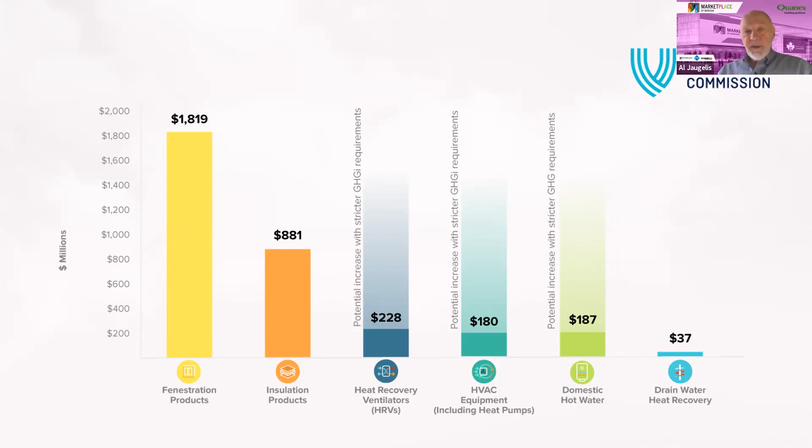So this is an increase in economic value that's projected as the step code moves forward. Absolutely. The idea here was to help the various sectors appreciate that the step code was going to lead to increased economic activity in these various sectors of the construction industry, with the largest amount of business growth coming in the windows area. Absolutely, 100%. I think what the case studies you're going to look at will highlight is that windows are the main drivers and enablers of these changes.

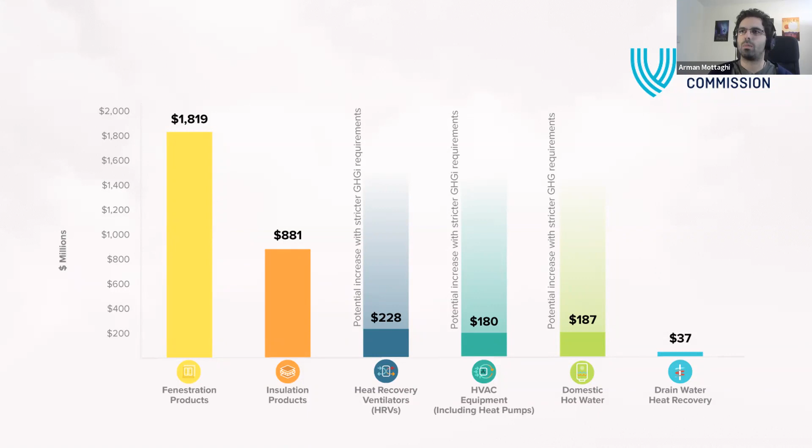So when we look at the total area of buildings built all across Canada, we see that single family homes and row homes, these smaller buildings, have the largest total built area across different sectors. But the cost of building one instance of that building, one archetype, is the lowest among all the archetypes. Then we get to the high-rise apartments, which have the least total area built, but a lot of construction cost to build one.

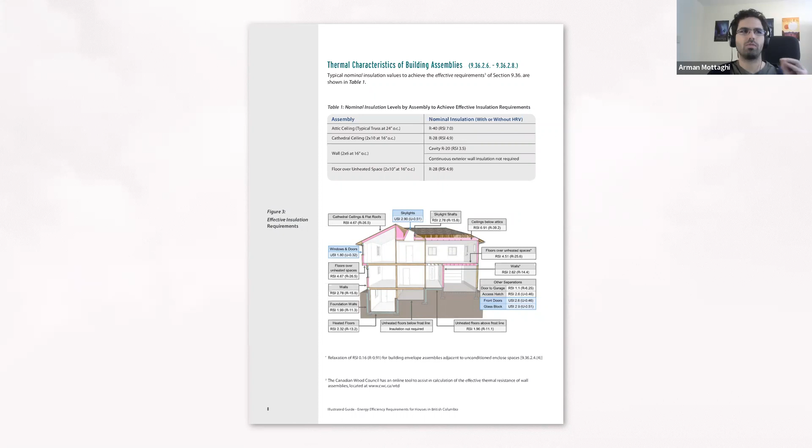So for example, when we look at the windows, we have a U value of 1.8. For the walls, we have an R value of 15.8. And as long as you were meeting these thresholds, these minimums, you would have been fine with complying with the code.

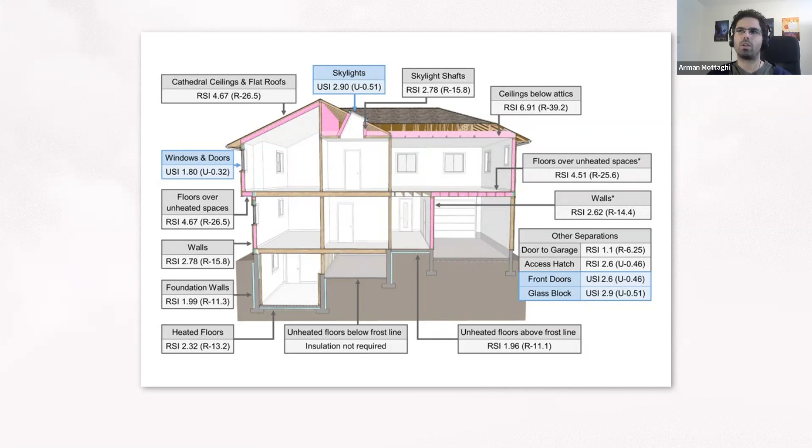Now this wouldn't really work out when we look at the building science principles, because heat transfer in buildings is rather complex. So when we look at the math of it, it seemed like at the time, and it was true, that we need to move on to a more comprehensive system. To give an example, I want to show this photo of a small window in a wall that basically tells us how much heat loss can be caused by a weak element inside the envelope.

Looking at this white area, which is supposed to be the wall, we have 0.25 watts per square meter of heat loss, and for the window piece, we have 8 watts per square meter. But when we put these two together and calculate the heat loss for the unified system, we see that the contribution of that small window is actually about 4 times the whole wall system.

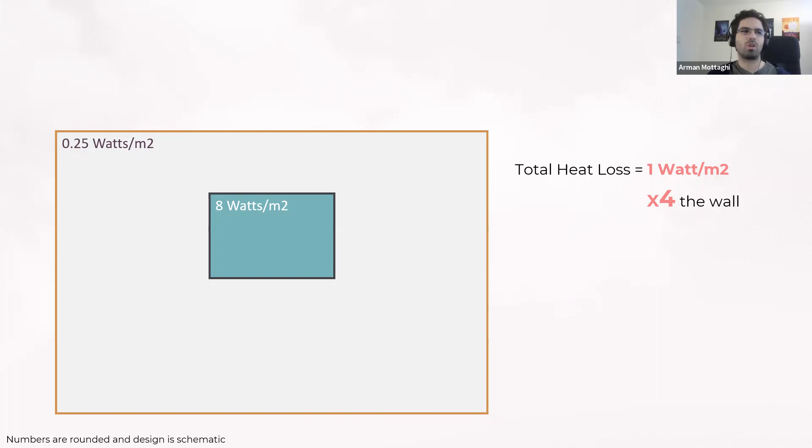So the overall wall system has a heat loss of 1 watt per square meter. And if the size of that window changes, we could be looking at heat losses maybe 10 times the wall area. That is the problem with prescriptive codes being set in stone in terms of minimum code requirements. We definitely want a flexible system that looks at the actual building performance, not just the minimums that have been set, which may differ from one building to another.

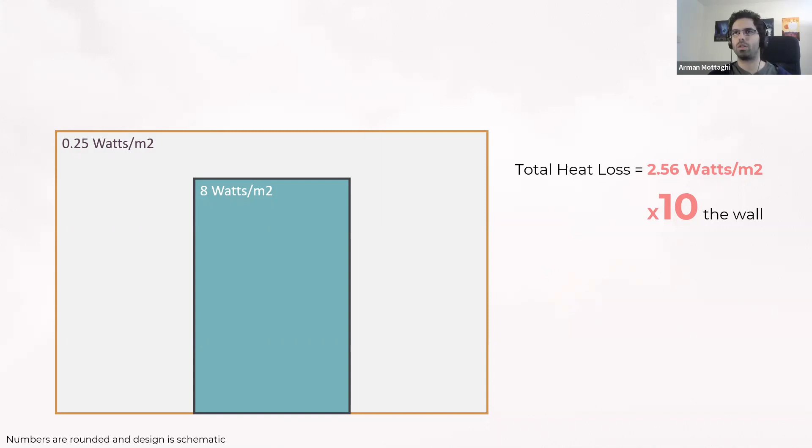I think this has shown itself in the results, or average house consumption, in Canada. Single family homes are using over 120 gigajoules of energy per year.

Now, if I want to put that into context, I'd like to think about making pasta. I'm always amazed that you put a small pot of water on the stove and it takes a very long time for it to start boiling. 120 gigajoules of energy is enough to boil a swimming pool.

One thing I was thinking about, Al, looking at this—I've gone through this a few times, but for this presentation, it came to my mind that actually the older window technologies might exacerbate this issue. I'm thinking the sealants might fail, or some of the properties of the windows might deteriorate over time, and might actually contribute to this average consumption of buildings in Canada. Do you think that would be a true notion?

Well, I think if you went back to the time of aluminum windows here in British Columbia especially, up until the 80s you still had single pane windows being installed, and in the 90s they upgraded to double glazing, but still in aluminum frames. Many of those products have been replaced because the glass failed in the units, as they didn't manage water very well. But the single pane products, the weather strips wore out, the hardware broke down, and made them hard to operate. Of course, they weren't very airtight to begin with, and once their weather strips wore out, they're even less weather tight. So yes, potentially that generation of windows was a huge energy loser.

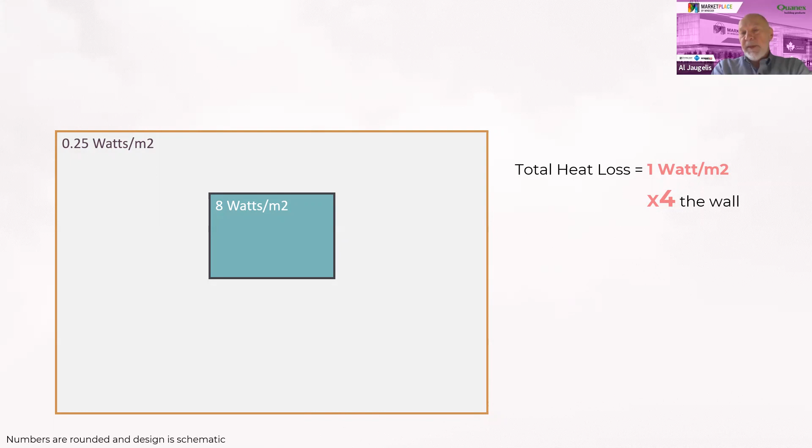And the bigger you make that window, as in the next example, that could be a glass patio door or a large window. Now you're losing so much heat through that window that you could double, triple, or quadruple the insulation in the wall.

It's not going to make up for the heat you're losing through that window or glass door. That's the problem with the prescriptive building code - it makes everything a little bit better: the wall a little better, the window a little better, the roof a little better. But because the window is the biggest energy hole, making it a little bit better wipes out most of the improvements you've made elsewhere, since most of that heat is still escaping most quickly through the window.

So this is the thing I think sometimes people have a hard time wrapping their heads around - not realizing that the energy loss through windows is hugely greater than any other part of that enclosure. Once you make a significant adjustment to the window, it gives you more value than adding insulation anywhere else. I think this kind of slide, if people stop and think about it, focuses on why windows are so important to anything you're going to do to improve the energy performance of the home.

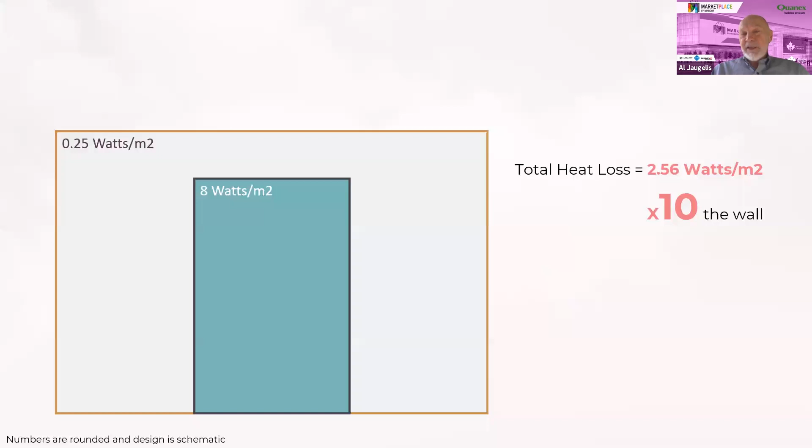As you mentioned, if a typical home heats enough water to boil a swimming pool over its lifetime - if you could deliver it in one hour to the swimming pool, you could boil it. That's a lot of energy, and this is where the codes are trying to solve this problem. And this is just for one year for an average home. Thinking about it is mind-boggling - it's not even a poorly built home, just an average home for one year.

And there are so many low-hanging fruits and opportunities to improve on that. We are also doing some work in retrofits that I will briefly mention at the end, but it really shows us the market potential, in my opinion.

So moving on to the heat transfer mechanism. I want to actually, I think what you brought up is a great segue for this subject, which is about how heat is escaping from the building. I think you made a really great way of introducing how all these components work together, but in the meantime, heat likes to escape from the path of least resistance, as academia likes to put it.

So when we talk with people who aren't really well versed in these building science principles, and they have a design that has considered their environment, the shape of the areas they want to build, and we ask them, okay, what would you do to improve the energy efficiency of this? Usually they go to their areas of comfort, what they see as easier to add insulation to or build better, or they go to what they think should be right, such as hot air going up. So they start really focusing on the roof.

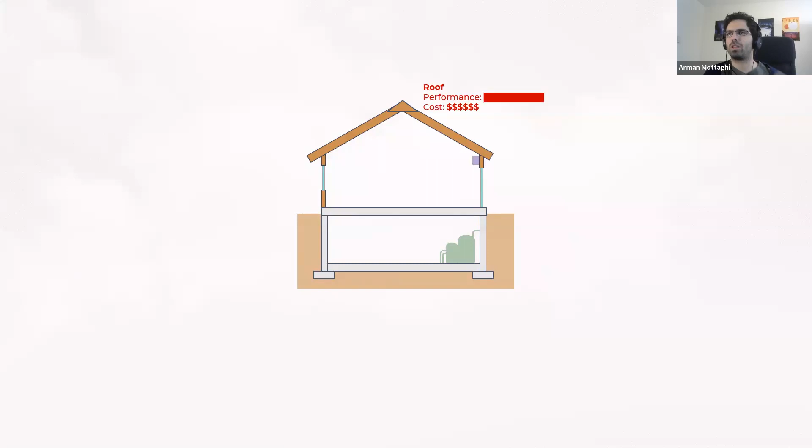Now for attics, for a lot of builders it's really easy to blow in a lot of insulation inside the space and think they have really helped with the heat transfer. But then there are some other areas that may not be their comfort zone. I put window and boiler as one example here, but let's say they go with a low performance and low cost configuration. Now, based on what you said, I guess we are both expecting this building to perform really poorly.

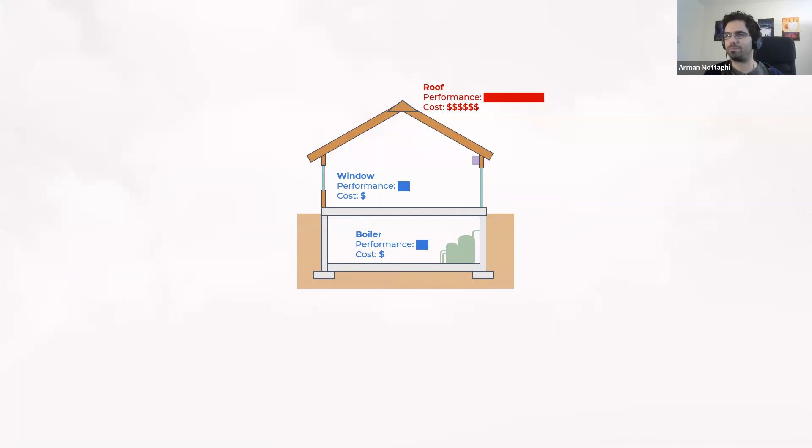Yes, in other words, if the first thing the builder does is add roof insulation and thinks that's going to help a lot, that might not be the best choice, right? Absolutely, absolutely. And in the meantime, when the costing comes into play with this, we see that this is going to cost a lot too, because we are dealing with diminishing returns. As you mentioned, you may add a lot of insulation to the part that's already performing somewhat better, but it doesn't really address the issue.

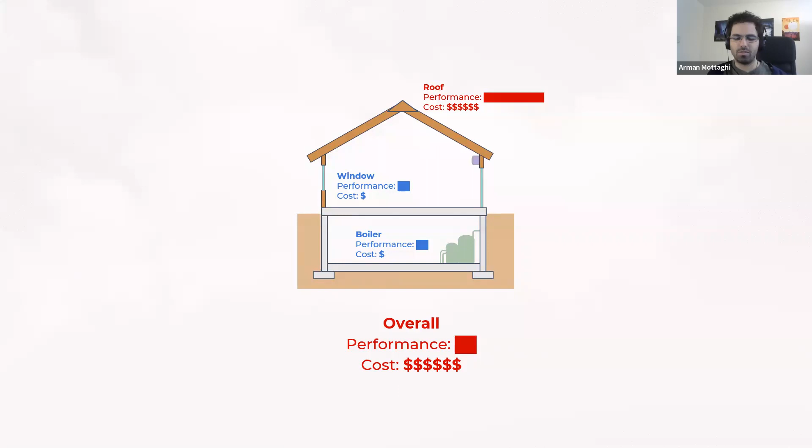And the way we put it into context - I think you have seen this example a few times at least - is imagining going skiing on a very cold winter day, but going skiing in shorts.

So I'm uncomfortable, I put on a jacket. I'm still uncomfortable, I put on another jacket. And the only thing that I brought with myself are jackets. If I go skiing in shorts, I'm going to be uncomfortable no matter how many jackets I put on, because I'm not really addressing the place that the heat is being lost.

But harmonizing these insulation levels, while, for example, marginally has a higher cost for the individual window, it may result in much better performance at a lower cost level, because we are evening things out.

We are putting a tracksuit or a skiing onesie and going to our skiing trip, and now, even though we are lighter and more comfortable, the heat is staying in because it's uniformly insulated against. And that's the case that we have been trying to realize with the work that we have been doing. We have been trying to find the opportunities of getting materials and components that work together really well.

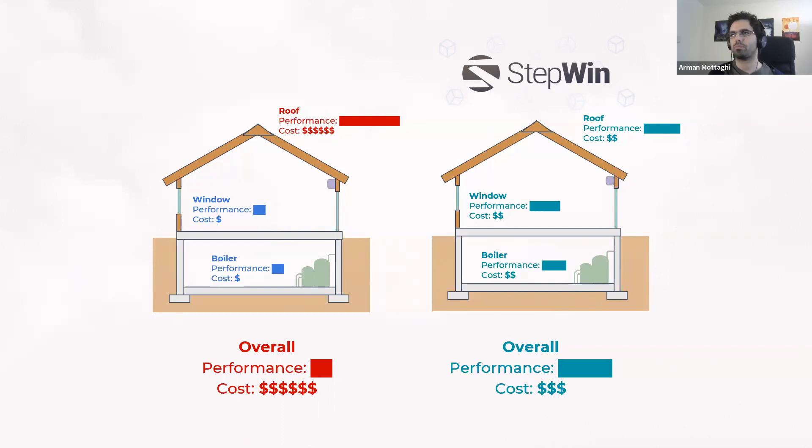I'm wondering if there are any questions so far, Al. There's no questions as of now. No, thanks, not yet. Thanks.

Okay, so let's look at the performance-based requirements. We talked a little bit about them. We talked about the BC Energy step code.

Another way of putting it is heat, or basically heat or cool, being like water in a bucket. And the bucket is representing our building insulation. If our windows or any other component in the building is a path of heat loss, it acts like a hole in the bucket. All of the water tends to escape from there. And we need to address the holes, not thickening the wall of the bucket without addressing the holes. That doesn't do anything good for us.

So I think one of the pieces that comes into play is the more complexity we have as we are trying to address the heat loss issues.

Al, I was surprised and interested to learn that the center of the glass is actually performing really well for many of the windows, and the challenges appear to be around the edges. So it seems like these paths of heat transfer, paths of heat loss, are becoming increasingly challenging places to address in order to really get a high performance window.

And this is where the performance-based improvements really come in. So we like to split our opportunities into two parts for improving the building: one is the building envelope and the other is the mechanical system. The building envelope being the roof, the wall, the window, the basement, all of the foundation pieces. And the important things here are making sure that they have high insulation values, as effective as possible.

So in all of those components, there are paths of heat loss. It could be through the joists, it could be through very highly conductive materials like spacers. So we want to make sure those are minimized. And in the meantime, we want to make sure that each of these components are airtight, so not a lot of cold air can bypass them and get into the building. You could have the best material out there, but if you don't really work on the joints, it wouldn't work well.

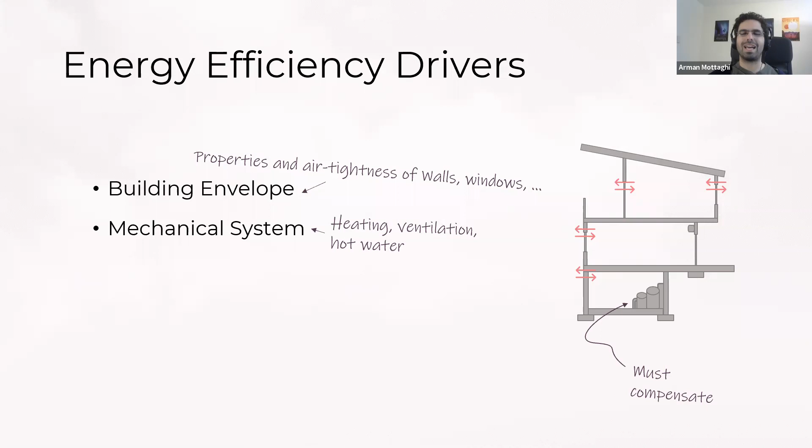Now, when we have saturated and exhausted all of the envelope potentials, then it comes to the mechanical system. The mechanical system is something a lot of people really focus on when it comes to high performance buildings. But for us, it's actually a secondary approach or pathway, because we think the most efficient mechanical system is the one that never turns on. We want to give the mechanical system the least amount of reasons to turn on and compensate for energy loss within the home, by making a good envelope in the first place, with windows being an important part of it.

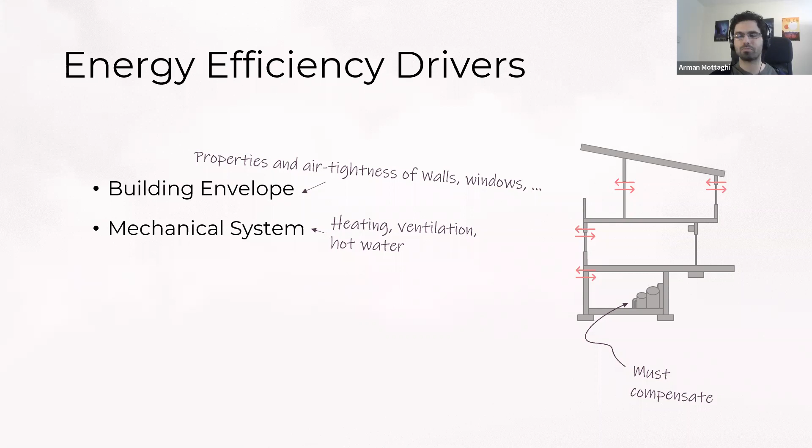So that's the reason we see an 80-20 situation with the choices in the building, that the first 20% of the decisions we are making really yield 80% of the results within the construction.

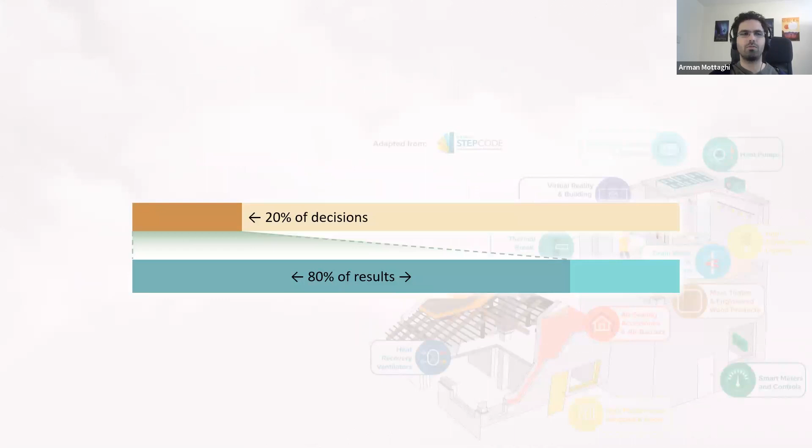But finding the right choices is actually rather challenging, because there are all of these different components that interplay with each other. When builders go to market, they are dealing with multiple options within the market for each part of their building. And overall, those pieces together are going to form one optimal design, but finding that resembles finding a needle in the haystack—it's so hard to find the best compliant design.

So usually people just try to find something that works, and finding the cost effectiveness, or the return on investment perhaps it's better to say, on the construction cost, is not optimal with a trial and error approach.

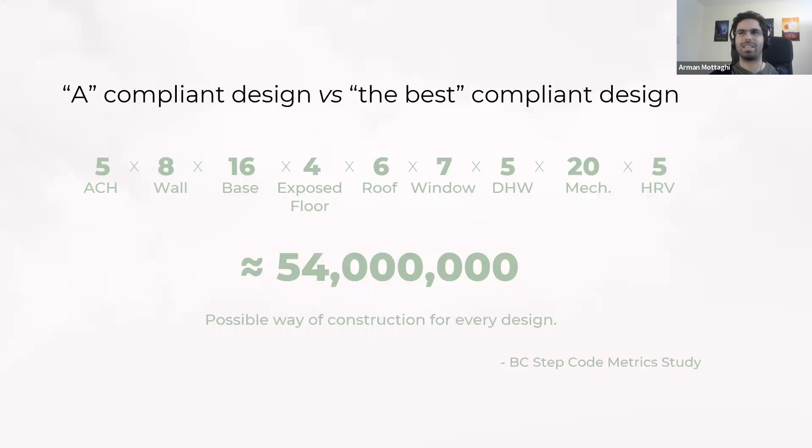So let's talk about the impact of good windows in this whole equation, in finding this best building. I would like to think that windows could put people on different routes. Let's say we have a builder who is faced with three choices: one being a high performance but more expensive window, one being a medium performance and slightly costlier window, and one just being the code minimum.

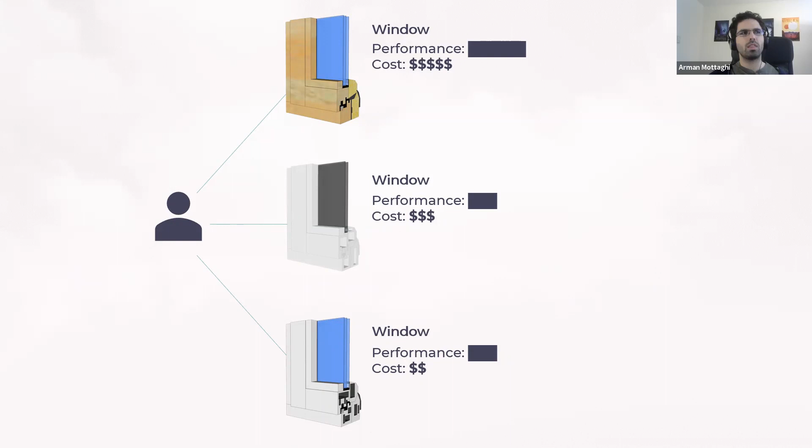Now, with the prescriptive requirements, we would want to go for the cheapest window that meets the code, or if the client has certain requirements, we want to go to the threshold that those requirements are met. It's not a strategy for us to exceed or meet any requirements by going higher than that. But I would like to think about these windows as putting us onto a path of different systems. Now, if we pick up a window that's inherently weak, we may need to compensate for the weakness of the window through another envelope component or through the mechanical system.

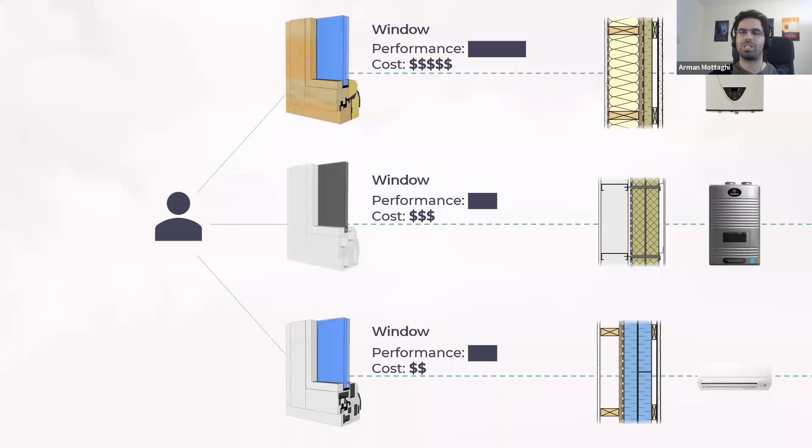So through the heating system that's overly efficient, when heat is lost, they can compensate for it in a more energy efficient fashion. But going for a higher performance window might actually harmonize our insulation much better, and put us on a path to more cost-effective solutions along the way, so that we have better systems, or easier to construct and easier to procure systems that give us better overall costs for the building. It's actually a very important shift in the methodology of what a good window can do, or basically any component in the building can do.

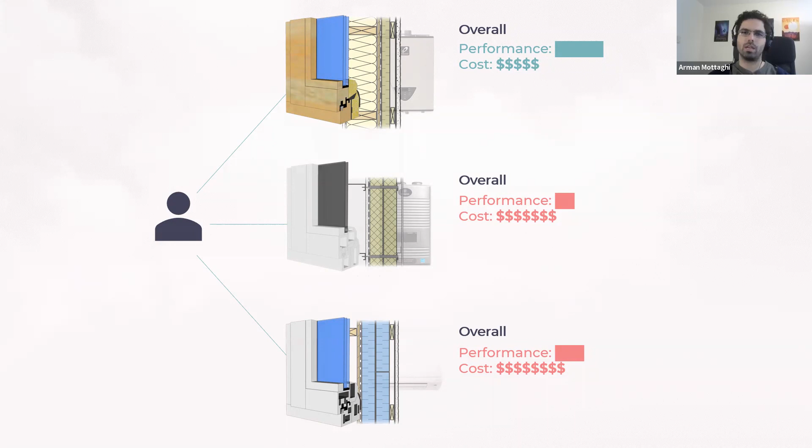We are going to ask a lot more from the people who are looking for something. What are you doing in the rest of the building? We really need to think about buildings as a system, how each part, just like a car, contributes to another one. And that is where I think the conversation about the water in the bucket, and what you highlighted, Al, about the role of these heat paths of heat loss play inside the overall building.

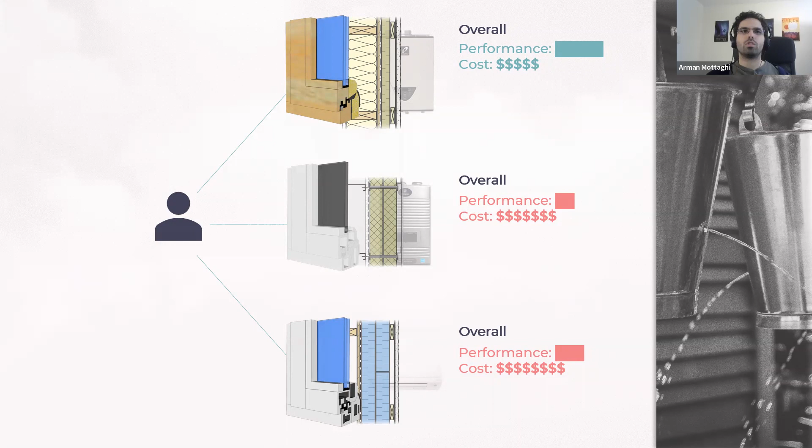So moving beyond prescriptive requirements inside BC and the rest of Canada means that we are going to look at very specific properties for each of these components, not necessarily just going to a minimum. If you get a call about somebody wanting to purchase a window, they won't ask for a step 3 window, because there is no such thing. They would ask for something specific compared to what the rest of the building is doing.

So before I jump into the case studies, I'm wondering, Al, do you have any points you want to add? No, I think the case studies will actually make the points clearly. So.

Okay, perfect. So I want to start with the Vancouver one. As I briefly said in the beginning, there is a success story with this case study, and then there is a story about potentials with the Kelowna case study that I want to show you.

But think of a typical downtown single-family home building in the city of Vancouver, and this has been presented to us. Our online interface, as Al talked about it a little bit, is called Step-In. It's a very simple tool for us to understand how performance-based requirements really work out. So when we talk about the step code, and also to some degree the tiered code, we need to put the design in software to really understand where this lands when it comes to the energy steps. So our solution to finding a really good compliant design has been Step-In, a very simple web-based interface. You go in there, put in the specifics of your design, and it will tell you where you are when it comes to the step code.

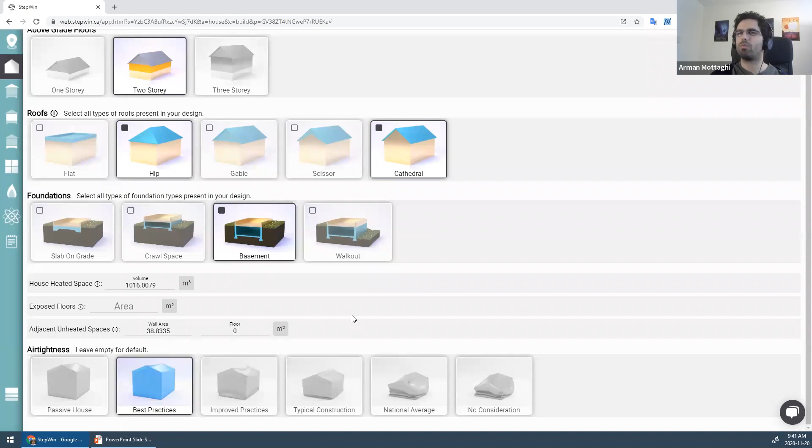The other thing we ask is the general properties of the building, how many stories, what sort of roof or foundation you have. Airtightness is one of the subjects we've been adding. Here we're putting a very high airtightness. I want to highlight this because I don't want airtightness to be a big subject of conversation, but it does make a difference in buildings.

So we asked what sort of roof you have, what sort of wall you're thinking about. I think also relevant is what sort of windows you're thinking about, what frame, what solar heat gain coefficient, or basically low-E coatings in the windows.

When you provide all of that information, we give you the best combinations that we think will work well. For example, here you've said you're considering double glazed PVC, triple glazed PVC, fiberglass, but not really considering wood windows—you see they're faded out. You also say you're considering an instantaneous mechanical domestic hot water system and a gas-fired hot water system. So we look at the combination of those two, and also the combination of foundation options with those things, and come up with tens of thousands of possible ways of building this building, and we cherry pick the ones we think work best for you.

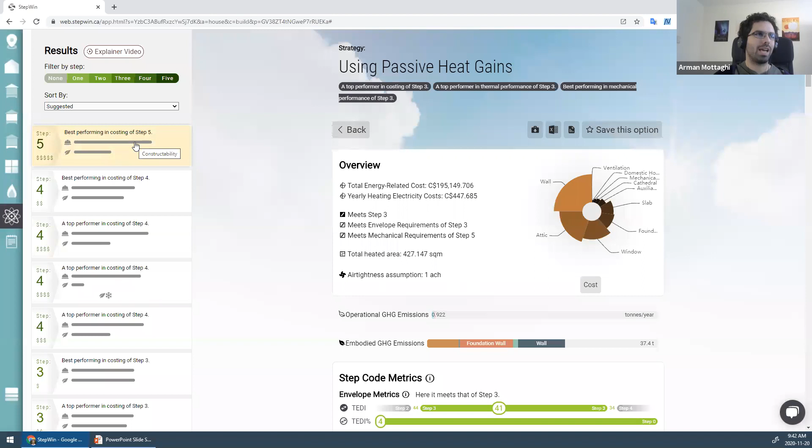As a result, here we have, from top to bottom, a number of designs we think are very interesting. You can click on step 5, and it tells you this design achieved step 5 with this kind of wall, that kind of window, and this kind of roof. So you get a formula of what made this design step 5. Now if you change something in the building, there's going to be a different formula for it.

Could I make a comment here? Yeah. So one of the things our listeners might not appreciate is that StepWin is designed to let a builder put in the geometry and location of their proposed building, then pick options of variables they'd like to consider—different ranges of window options, mechanical systems, other things. And as you've mentioned in other presentations, StepWin can rapidly perform thousands or hundreds of thousands of simulation runs of the various possible configurations, and plot the results in a way that can be used to find either the most efficient design or the most cost-effective design from all the options the builder has chosen, right?

Exactly, yes. So basically, typically if you were designing a performance-based building, you would go to an energy modeler and say, here's my plans, here's what I think I'm going to use for windows and doors and this and that. The energy modeler runs the model and says, oh no, it didn't work, you're not at step 3 yet, you need to make something better. Well let's try this, well let's try that. Each time, though, it's very time consuming to produce another run, and at no point are you sure you've found the most optimal configuration.

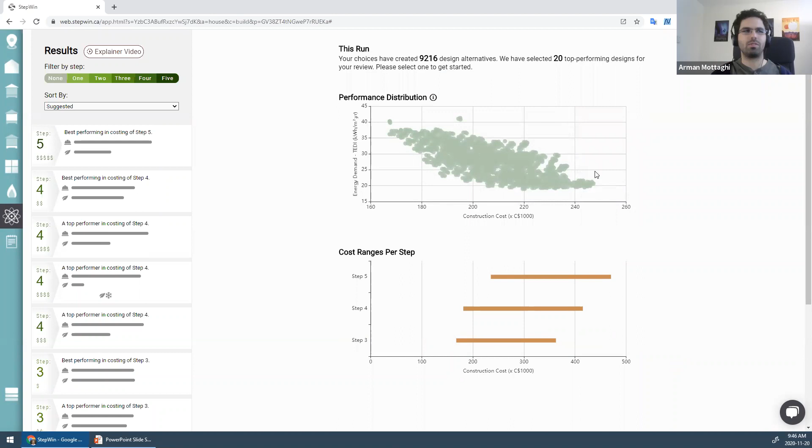The disk you see here tells you what costs are involved with the construction. So we have the wall being the biggest cost driver, then the window, then the attic. And if you switch and look at the loads, you can see that the windows are actually having a lot of loss in the building—and that is, I think, what we are talking about.

We were building up to this point that windows are one of the main drivers in any of the designs you typically see. We also have carbon considerations, heat losses and whatnot. But what's important is the recipe that makes that a step 5, and that's what I want to highlight. We find you a recipe that bakes you a step 5, step 4, or step 3 home in the most cost-effective way.

We do have a question here. Rick Solmer is asking, are the inputs for typical details of wall designs loaded for homes across Canada? That's a really great question. We are having this right now tuned to BC, with some considerations for regional BC needs. But the ranges we provide for insulations by default go from a simple 2x6 wall all the way to a heavily insulated passive house wall, which applies to most of Canada. We have some assumptions for rain screen and things that might regionally change, but you can override or put in your own assumptions and make a wall yourself if you want to.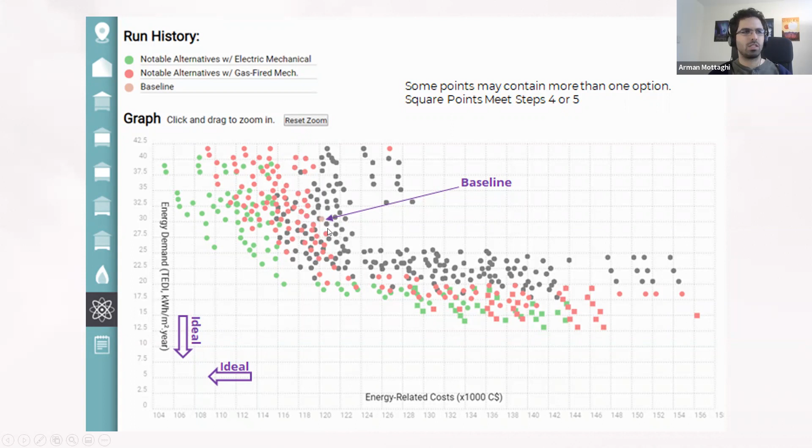But when we look at what the average builder has done, it's the baseline, this faint red dot you see here - it's not optimized for costing nor energy efficiency. So we gave them a few routes: going towards better costing, spending the same amount of money but getting a better result, or going towards a high performance route - spending more money but getting a really, really great home.

When we looked at these options, we realized the key enabler in this process was triple glazed windows. That was the key change that made everything better. It saved enough money from other places in the building, and it gave us a much more solid ground to improve the energy efficiency of the building in the meantime.

I really want to highlight this, I don't have a lot of time to jump into it, but we have a 17-page case study that you can reach out to me for. My contact info is on the last slide, and I would be more than happy to share all the details we dived into to really come to that conclusion on this building.

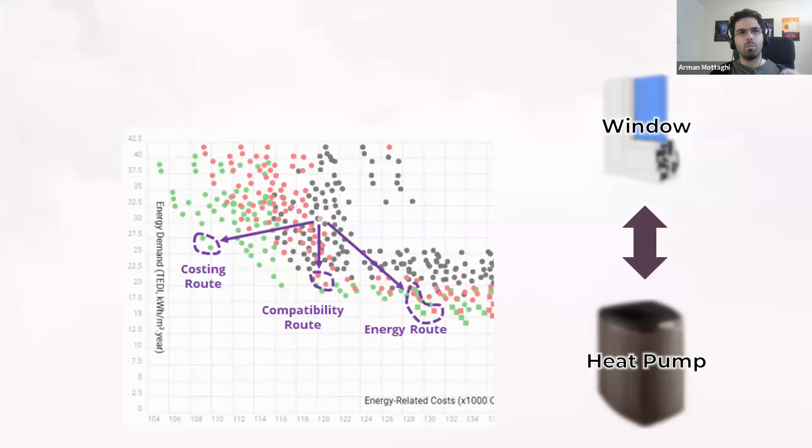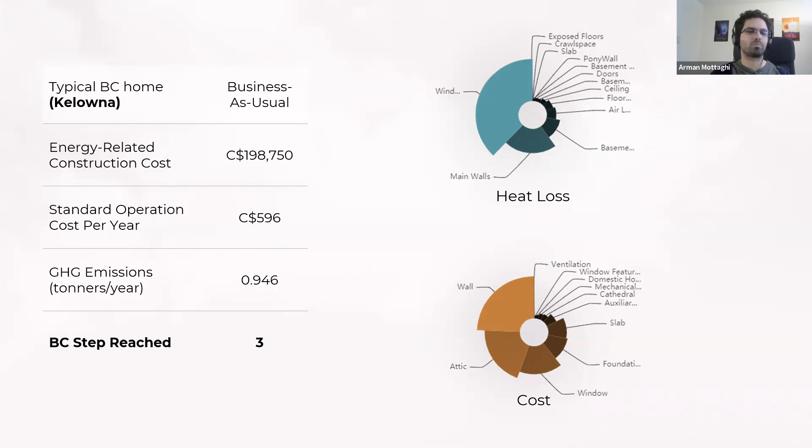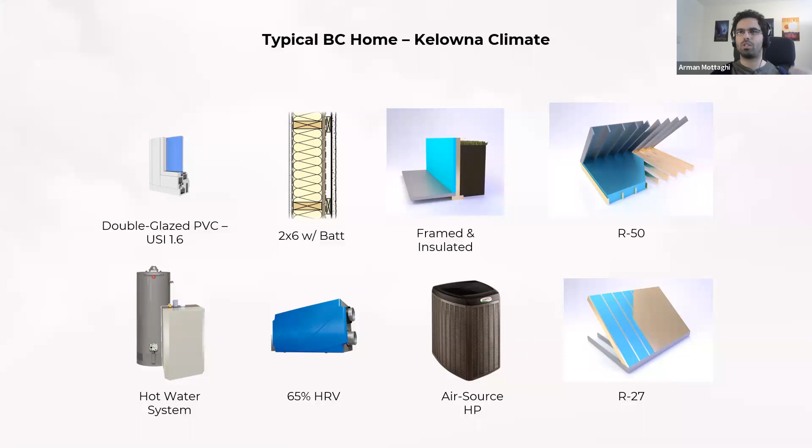We gave this particular configuration to StepWin, and also gave it options to improve on, to see if there's another configuration that could get us here or somewhere better at a lower cost. What we saw was that StepWin optimized this design and reduced the cost by doing a few things that seem somewhat strange.

But when you think about it, it has a number of rules to play against, and it works until it reaches the best pathways. We want this optimization guided by human interaction, so we have options in the interface to limit or direct the decision making. Generally, what happened was we went for a lower construction cost, in the factor of $20,000-$30,000, by balancing out some of the roof insulation and decreasing the window properties almost to code minimum.

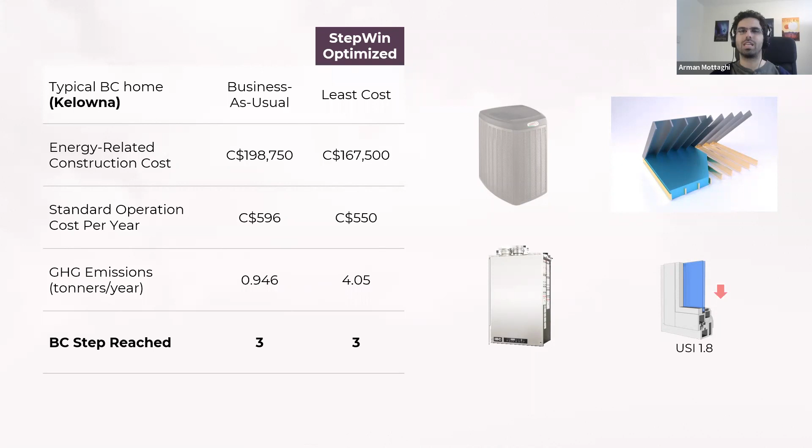Combining the mechanical system into a combi system, and also getting rid of the heat pump, which are strange choices, but when we're really trying to cut down on cost, that's the way it goes. It was able to maintain a Step 3 despite all of this, partly because of very high air tightness. It really tells us there are many different pathways of reaching the same performance, even if they're a bit counterintuitive.

But we didn't want to cut down costs at the expense of everything - we wanted a suggested design. I was initially thinking the windows would play an important role, but I learned that the suggested design from StepWin, while saving around $20,000 from usual construction costs with rebates considered, was increasing the building from a Step 3 to a Step 4.

So now we're getting really close to high performance. The strategies used by StepWin to improve on that were improving the HRV system, improving the wall system by putting insulation on the outside, and going for an ICF foundation system, which is more insulative. It started looking anywhere it could cost-effectively improve the design while saving money - and windows were not part of this equation.

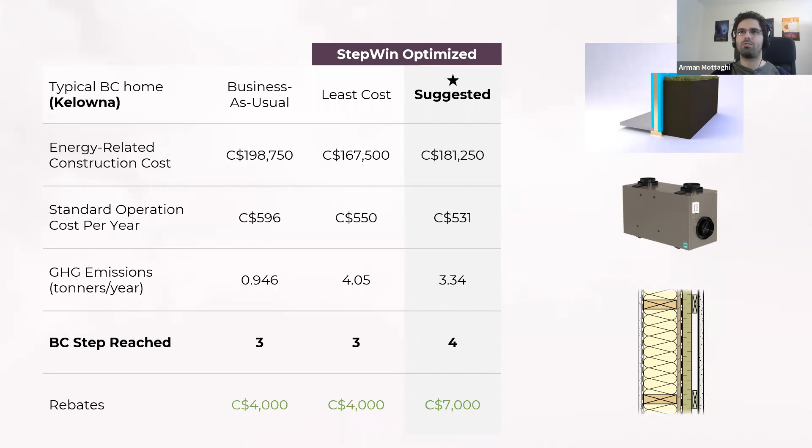So now we thought about going one step up - what happens if we want to go to a Step 5? Then the windows played a very important role. It went with a very high performance wall and a fiberglass triple glazed window, which was the best option we had available, with a USI of around 0.9.

Now, I don't know if somebody here would like to comment on whether better than this can be done, but that was the extent we were willing to go with it. Of course, this is the highest cost for our building, but it also gets the top highest energy efficiency level. There are some rebates that could help with the additional investment, but it's important to point out that the windows, and reducing the path of heat loss, building science played a role.

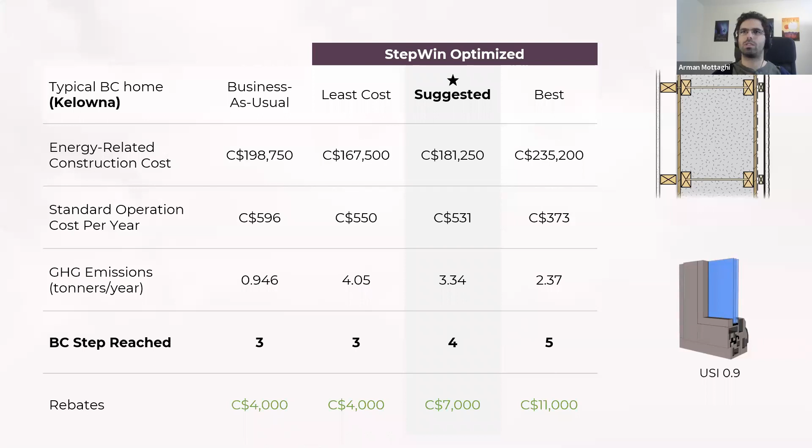What I'm highlighting here is that perhaps if there were more window options available inside the interface, or if the costing spectrum across different window options were different by a step, addressing the heat loss through the windows would have been a better option rather than going for another wall or another HRV system. Windows were not the cheapest option until the software was essentially forced to use the high-performance window because there were no better things to do.

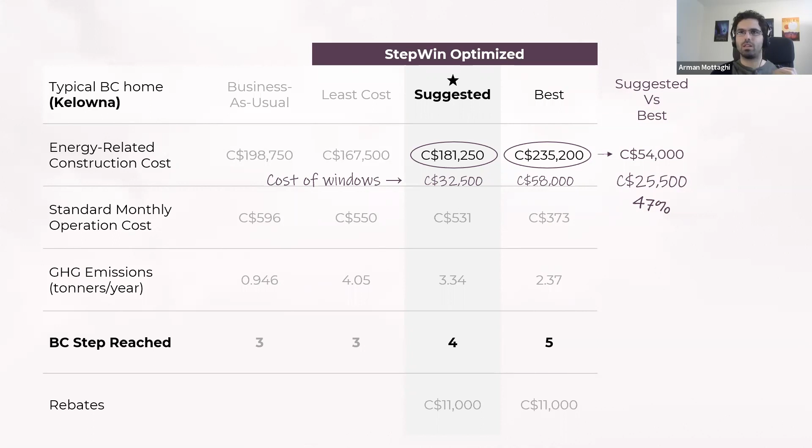When we talk about that optimization, going from a good case to the best case, actually a lot of the money, almost half the money, went into the windows because that was something the software could not avoid anymore. I can talk about this for hours, but with the few minutes we had, I hope this gave you some appreciation of the complexities there.

We also have a new product line coming out called Properate that focuses on simplifying this into very understandable sheets of information next to one another. This is one pathway and that's another pathway. We are trying to do this for existing buildings, and I think it's going to bring a lot of value for people to have a simple understanding of the most cost-effective ways of approaching their construction.

At this time, well, the interesting thing is that StepWin has the ability to do this kind of rapid analysis and compare multiple options. The results are very specific to the climate zone the building is in and also the design of the building. So in this case, it's showing you that what was optimal in Vancouver was not optimal in Kelowna, and led to a different outcome. Again, the interesting thing here, and I think the potential for the future, is that if the right costing information is available for different geographic areas, this kind of tool could be very helpful in helping builders make the most cost-effective choices to achieve a certain performance level, in a way that currently they just don't have access to.

So absolutely. And I'm wondering, in the Kelowna example, if there were a more cost-effective window available, like a lower U-value for the price we had assessed in our database, then maybe that would have given a better design than going for an HRV or for a better wall.

I think that's how the conversation you have created, and big props to you on this subject, really encourages our industry, the different pieces of this puzzle, to look at the potentials out there, and how a new improvement or innovation in this area can bring more market value to them, create more business, and in the meantime realize better homes.

Great. And so, as manufacturers introduce more product lines to the market, you might end up with better pricing on some of the higher-performance windows than you currently have in your database. So it'll be interesting to see how that plays out.

Yes, and it can bring in more funds into the window industry than other potential options. So I'm really excited about this interplay of different choices in the building, and seeing how that would eventually result in just better buildings overall.